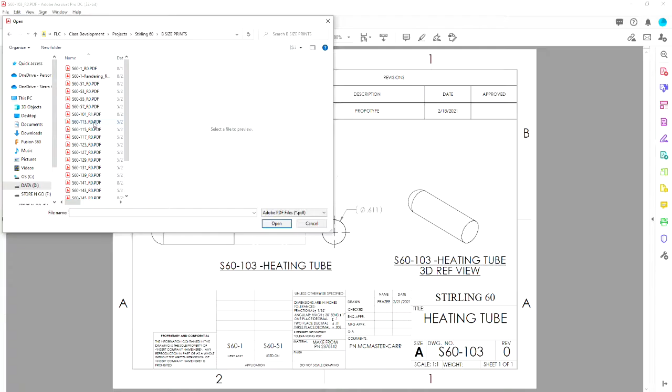Okay, we're gonna open our CAD file. Okay, so here's the drawing for our primary piston shell. It's made out of brass, and we've got some pretty good dimensions here. So we have a 30 thousandths wall thickness typical, and we have a spherical radius of 0.26. Now we notice in the side view we also have a diameter, so we want to use the tighter tolerance number for our modeling. This has been rounded off.

Sometimes this type of feature is hard to make on a manual lathe, so they've given you a little more liberty on the tolerance of the nose and tolerance on the inside wall thickness, except for the very first few bits, because that's where another part solders in. So they want the tolerance a little tighter there, but we're going to model everything at these tighter numbers. Okay, so we're going to go over and start our sketch, and we're going to do this pretty much the same way we did the heating tube part.

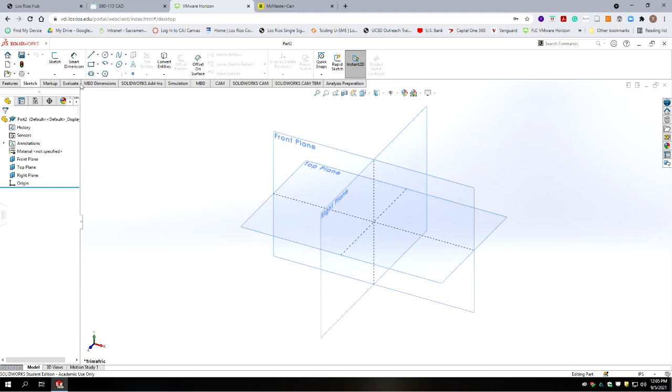Okay, so we're in SolidWorks. We're creating a new part file. And we're going to make it in the primary view the same as what was on the drawing. So let's make our planes visible. We're going to do a sketch on the front view. We're going to make a centerpoint arc from origin. And then we'll make our second point vertical, drag to the left, and have it terminate on the other plane. So this is somewhat constrained.

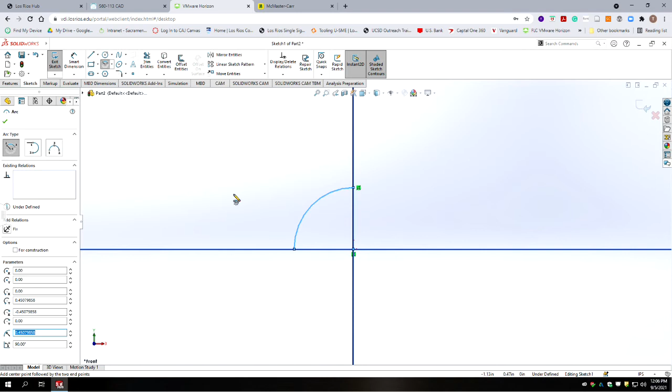And we're going to take a line and put it on the end of there, and we're going to go tangent and horizontal. So I've already got those relations there. Okay, and now we can go back to our drawing and throw a couple dimensions on. Well, let's give this thing wall thickness. So if we go back to our drawing, it's a 0.512 diameter. Okay, so let's go back to SolidWorks, and I'm going to make this radius 0.512, and we're going to divide that by 2, and that gives us our radius.

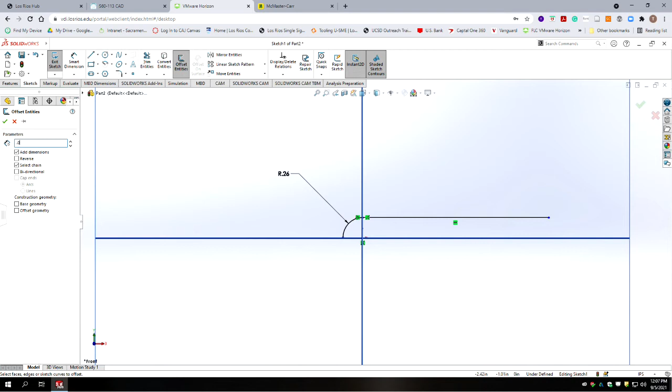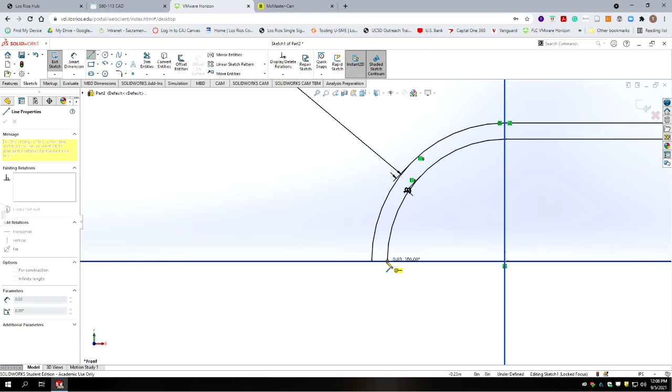Okay, so this set of lines is now fully constrained, except for the length. We're going to hold off on the length. We're going to go offset, and we're going to go 0.03 for 30 thousandths wall thickness. And we'll select our chain. Okay, so now we have our wall thickness. Then we connect our endpoints. Okay, so now it's all shaded in the center, which tells us it's a full loop.

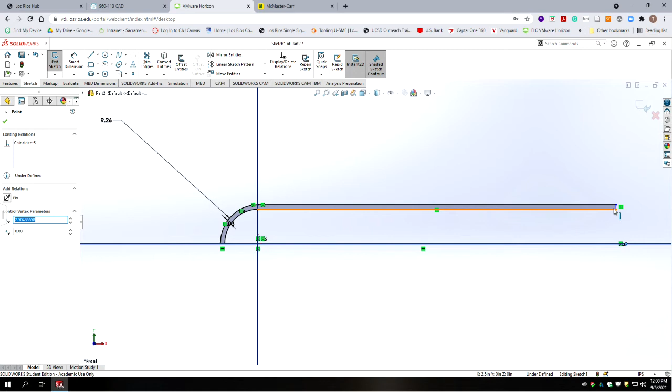And now we're going to create what we need for our revolve as a center line. So let's go from the endpoint there. We want a horizontal line, and we're going to make that point coincident with the end of the tube. Now we need to give it our overall length. It's the last constraint, because the length of this can change right now.

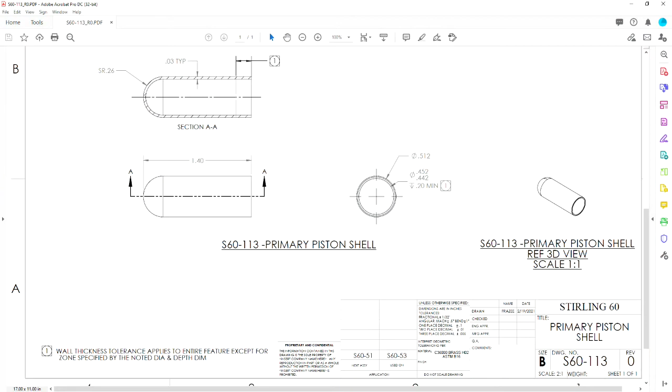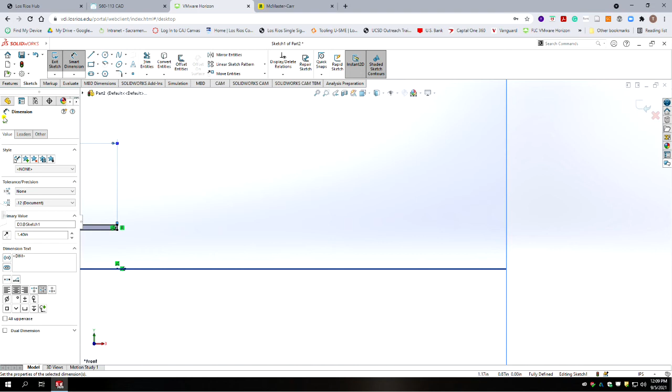So we go back to our model, or our drawing, and it's 1.4 in length. We measure from the end point of the nose to our vertical line here, 1.4. There we go. Our sketch is fully constrained. There's no longer a little negative symbol by it. We're ready to revolve this.

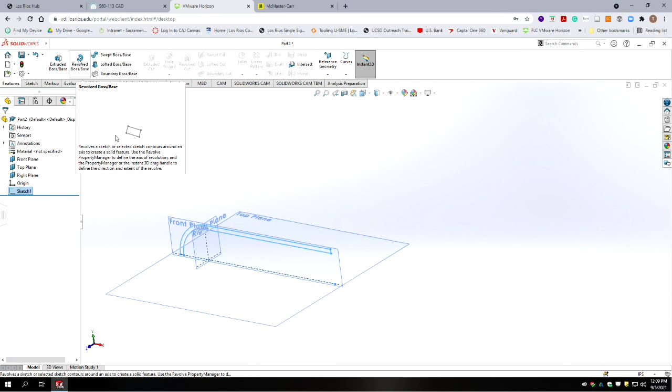Alright, so we'll go again to a 3D view so we can see what's going on. And we're going to go Features. We're going to do a Revolve Boss/Base. It's kind of auto-selected everything for us because we had it highlighted. So it figured out that our revolution center was that sketch line. We want 360 and it goes all the way around. I'm going to select OK. And there we have completed the -113.

So pretty easy. Pretty much the same thing as you did on the last model, which should have been the test tube. You can change the material on this to brass if you like, and make sure you submit your file on time.